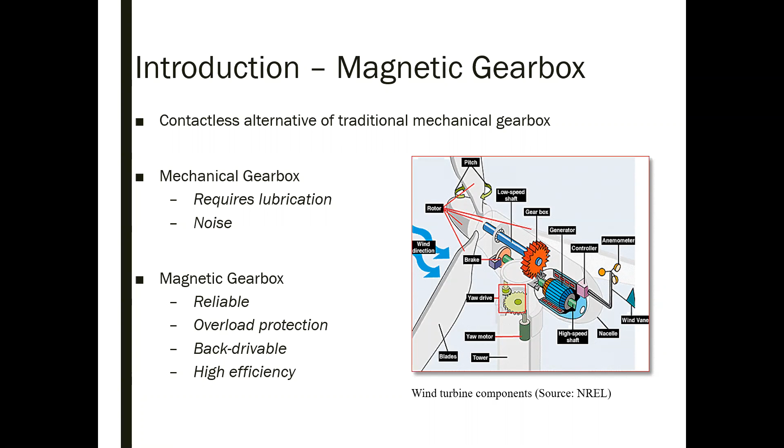This research is to design a magnetic gearbox with certain design objectives. First is to achieve a high volumetric torque density, preferably about 300 Newton meters per liter, while remaining a small outer diameter, which is optimal for wind turbine applications.

The assembly procedure for a magnetic gearbox has always been a struggle, so for this design we intend to improve the assembly process and hope to benefit future designs. Previously, a main source of loss was due to the conductive material used for cage lamination support, so to improve losses in this design we will need to make modifications to the cage modulator.

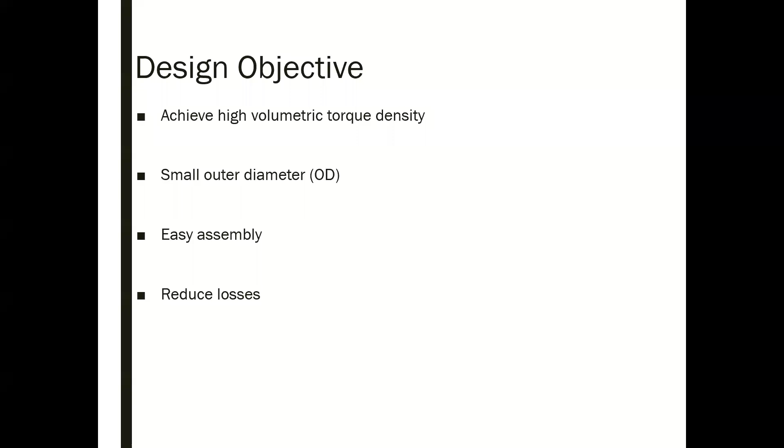In order to accomplish all the tasks, some decisions were made at the very beginning. The Halbach array was known for its property of creating a highly sinusoidal field distribution, which offers the potential for both increasing torque density and lowering harmonic-related loss. Therefore, Halbach array rotors were applied to all magnet rotors for this design.

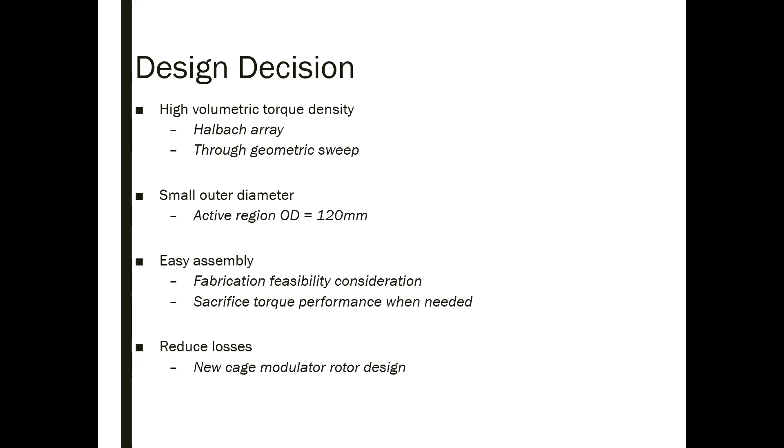An OD of 120 millimeters was selected for its size limit. Throughout the design process, we needed to ensure that all final geometric parameters are feasible to fabricate, and the assembly procedure should be considered while making all decisions. Finally, the cage modulator segment design will be modified to have a non-conductive material support structure.

To begin the design process, a few parameters were fixed. The pole pair combination was selected with 2 prime numbers to begin with. Ideally, with prime numbers selected, the design would result in lower torque ripple. Therefore, P1 of 3 pole pairs, N2 of 17 pole pairs, and P3 of 14 pole pairs were selected for each rotor.

This gear ratio was selected since it is within the most suitable range for small-scale wind turbine applications. Similar to the use of the Halbach array, in order to maximize torque performance of the gearbox, air gaps between rotors were set to the minimal mechanical fabrication limit of 0.5 millimeters. In terms of material, N48 neodymium magnets were selected for torque improvement purposes, and the cage rotor will be laminated steel in order to lower eddy current losses as much as possible.

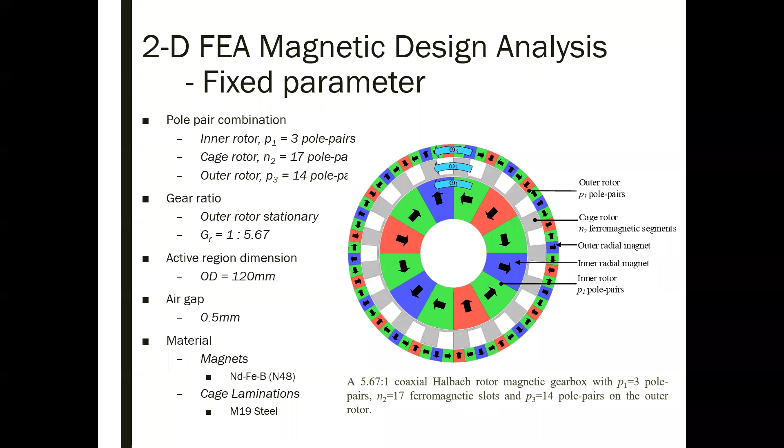With all the decisions made on these fixed parameters, 3 main variables were swept: the inner radius of the inner rotor RI1, outer radius of the inner rotor RO1, as well as the cage rotor radial length L2. Any other parameters would change accordingly to these 3 variables.

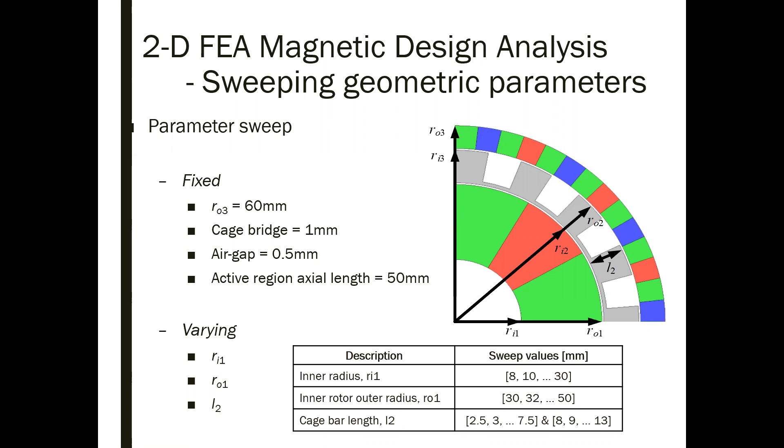A total of 2,244 cases were simulated under JMAG's 2D FEA static analysis when the gearbox is at peak torque angle. Volumetric and mass torque density were calculated to generate this plot. The color-coded legend indicates data points with different cage rotor radial lengths, where the top right boundary region of the plot would be the most notable design to look into.

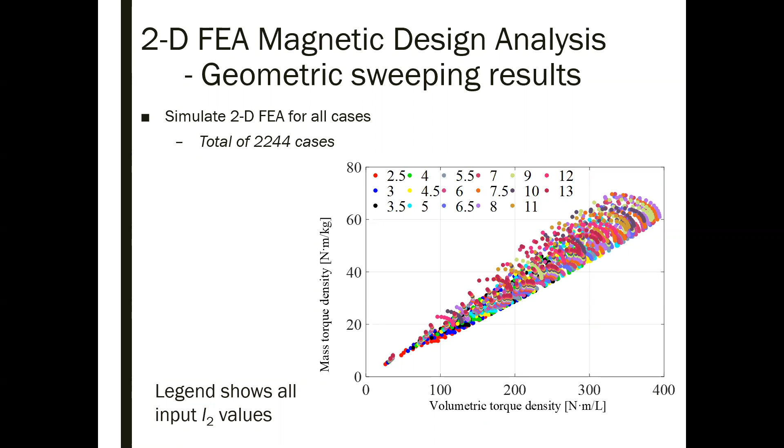Here's a zoomed in image. We can clearly see the performance of each interested case. The maximum mass torque density and maximum volumetric torque density cases were easily located, where the maximum mass torque density is labeled as design A and maximum volumetric torque density is labeled as design B. They show about 70 Nm per kilogram and close to 400 Nm per liter respectively.

However, we decided not to carry on with either of these 2 designs due to the fact that some dimensions were not feasible to turn into an actual prototype. For example, cage rotor radial length for both designs is so short that it's less than 10 millimeters. Any supporting structure we would use might deflect and close up the air gap. Also, design B requires an inner rotor inner radius of 8 millimeters, which was not preferred since we would like to have a shaft going all the way through the inner rotor.

To make the design mechanically rigid, we considered a few additional limitations on the geometric parameters. L2 and RI1 were limited to be no smaller than 10 millimeters and 15 millimeters respectively, and under this assumption, the trade-off design C was selected. Design C would have a relatively high mass torque density and volumetric torque density, while mechanically it would be feasible to fabricate and the structure should be rigid.

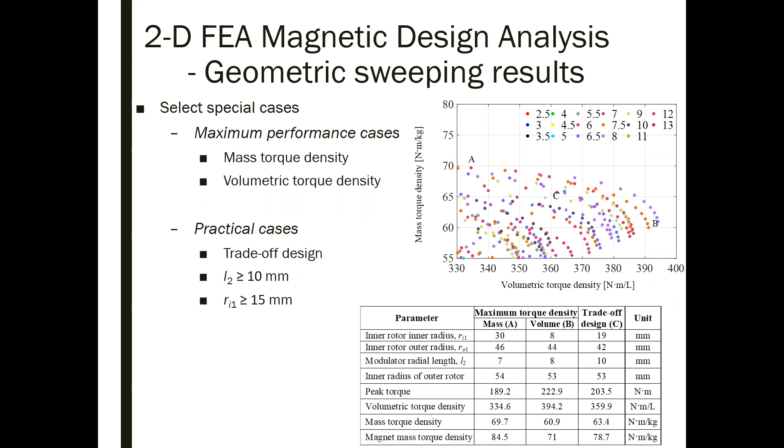In addition to the aforementioned geometric parameter constraints, further considerations and modifications were made based on the trade-off design. As mentioned before, we modified the cage design to allow a non-conductive material to further reduce losses.

For the cage rotor, the slot has been made rectangular in order to fit the supporting structure, as well as the inner rotor and outer rotor design.

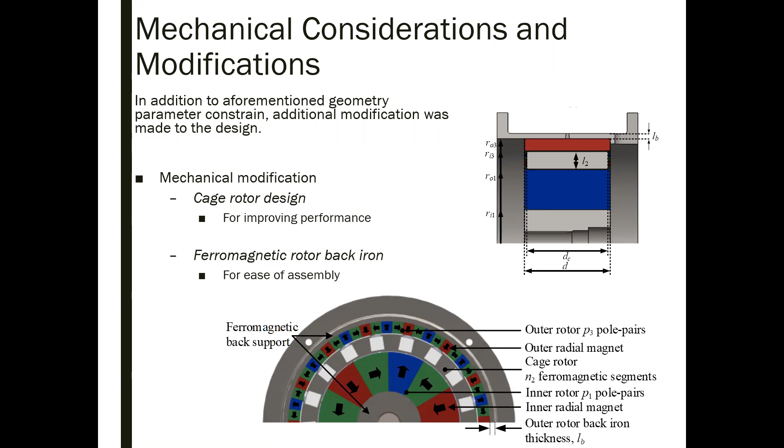They now have back irons for simpler assembly purposes. So in order to make the assembly easier, we now have back irons for both inner and outer rotors, since the magnets want to attract to the ferromagnetic back iron naturally, making assembly easier.

For inner rotors, since a shaft would need to go all the way through the rotor, the back iron was determined to be a solid cylinder with radius RI1. However, the outer rotor back iron still remains undetermined.

With the full axial length of the active region covered, the radial thickness was swept to study the performance. Outer rotor back iron thickness LB was added beyond the active region OD of 120 mm.

As expected, with the outer rotor back iron implemented, the torque reduced. LB of 3 mm was selected for higher torque, as it was the minimum thickness required to provide sufficient mechanical strength.

It can be noted that when only the inner rotor back iron was implemented, the torque performance was not affected negatively at all.

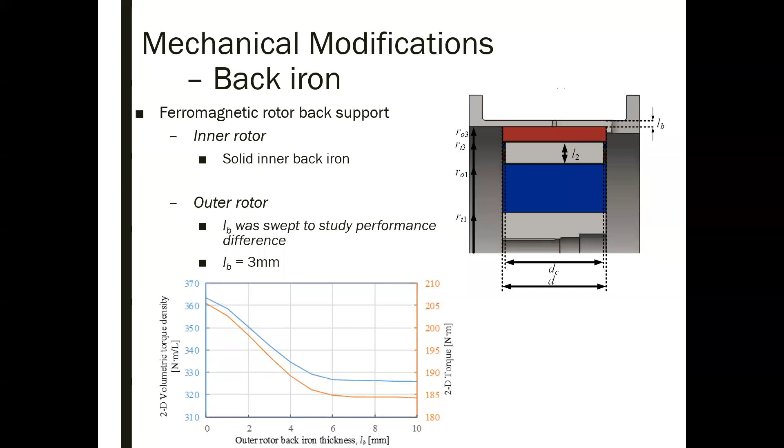Axial length of the model was also studied for its impact on torque performance. The finalized 2D design was extruded to different axial lengths. The 2D FEA simulation torque result changes proportionally to the axial length.

However, the 3D finite element analysis simulation showed a nonlinear relationship between the model axial length and the torque density performance, which was due to the axial flux leakage, known as an end effect.

If mechanically feasible, a long axial length would be optimal, optimizing the torque density performance of a magnetic gearbox. However, according to deflection analysis from the mechanical study, we finalized on an active region axial length of 50 mm.

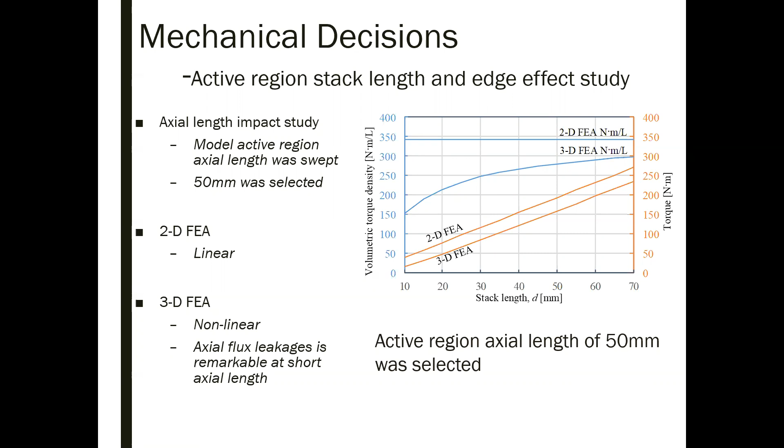So cage modulators are now modified to have rectangular slots. These slots were designed for inserting garolite bar cage supports. Garolite is a non-magnetic, non-conductive material. Therefore, comparing to previous designs which had steel rods going all the way through the center of cage segments, losses should be reduced.

According to Gerber in 2014, they showed that if cage rotor axial length was reduced slightly, the torque density could be improved, which leads to this last sweep analysis on cage rotor axial length, dc.

With a final active region stack length of 50 mm, the torque peaks when the cage rotor is 47.5 mm long, where the torque increased slightly above 1.3%.

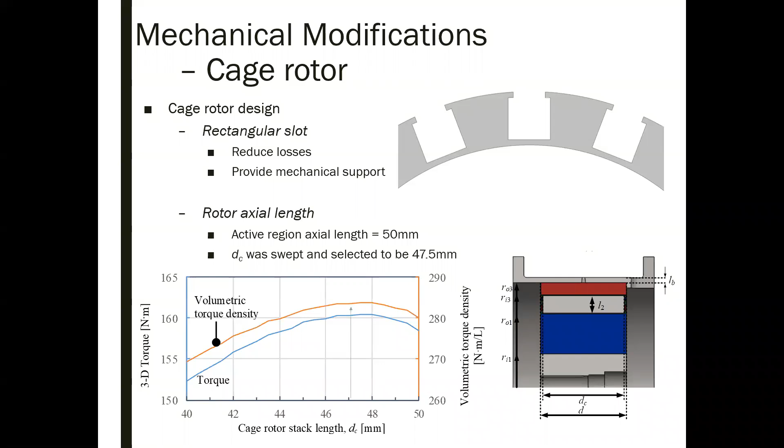Here's an image of the final gearbox design showing all the modifications that were made.

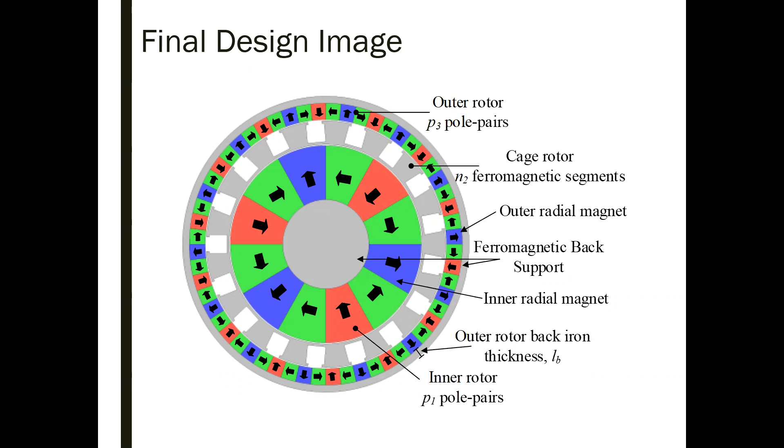After confirming all the geometric parameters, 3D FEA simulations were conducted. First, both inner and outer rotor were fixed with only cage rotor rotation, which is the case of pole-slipping. The final achievable peak torque was estimated to be 160.6 Nm, which is 284 Nm per liter.

Second, rotations were applied to the inner rotor and cage rotor according to gear ratio when the gearbox is at peak torque angle. Eddy current was allowed, and this demonstrated a torque ripple of 0.58% at peak torque.

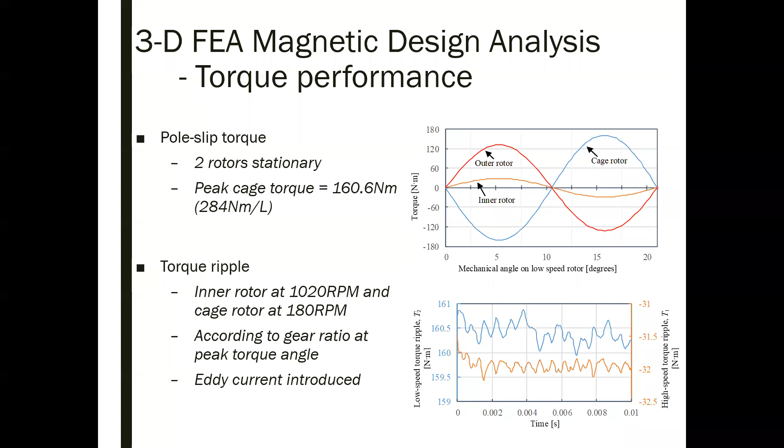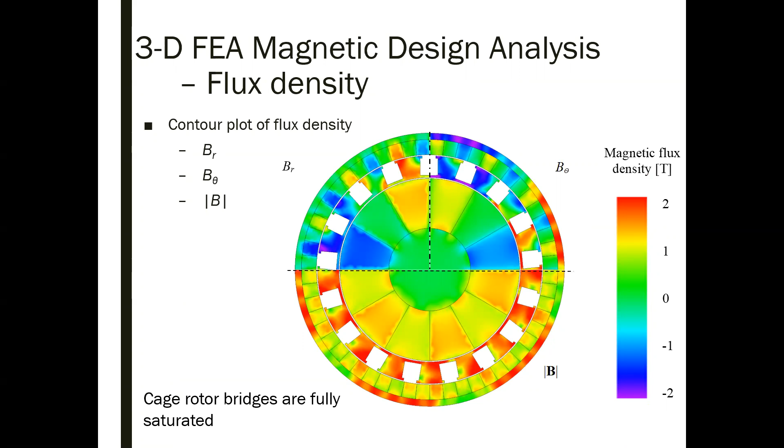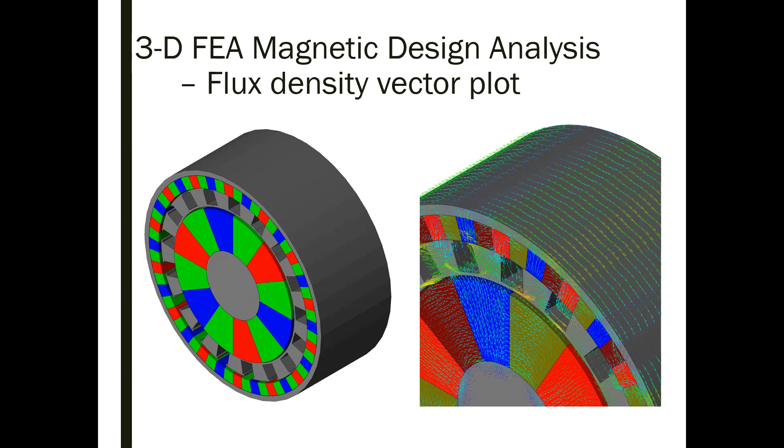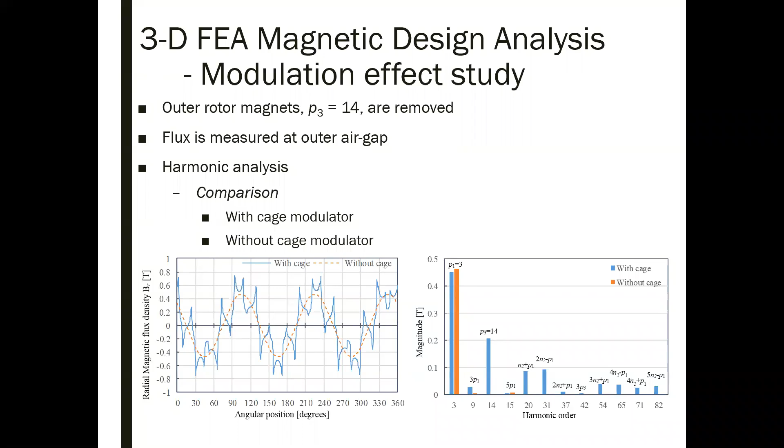After all analysis on the design, it was time to build a prototype. All garolite bars were inserted into the slots on the cage lamination, and Halbach array magnets were placed on both inner and outer rotors. The installation of magnets was indeed easier with the help of the ferromagnetic back iron.

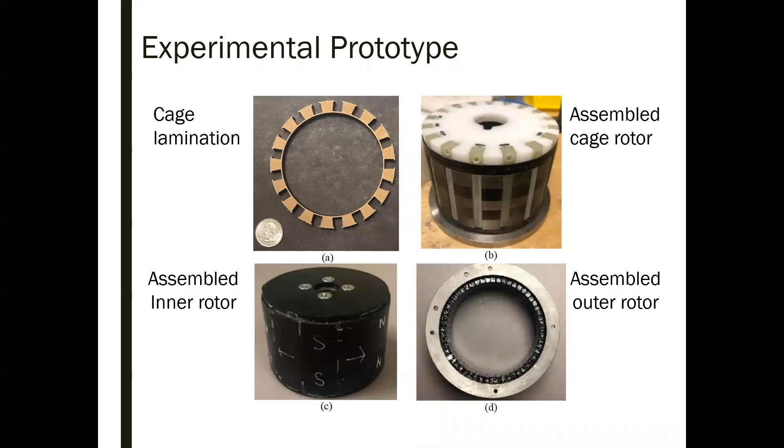Radial flux density was measured on both inner and outer magnet rotors to study any discrepancy between the FEA calculated result and the experimental result. Flux density was measured with a Gauss meter on both assembled rotors, isolated from all other components.

After collecting all data, a harmonic analysis was conducted. Here we can see the result for the inner rotor. It was shown that the inner rotor Halbach array magnets are slightly stronger than expected from FEA performance.

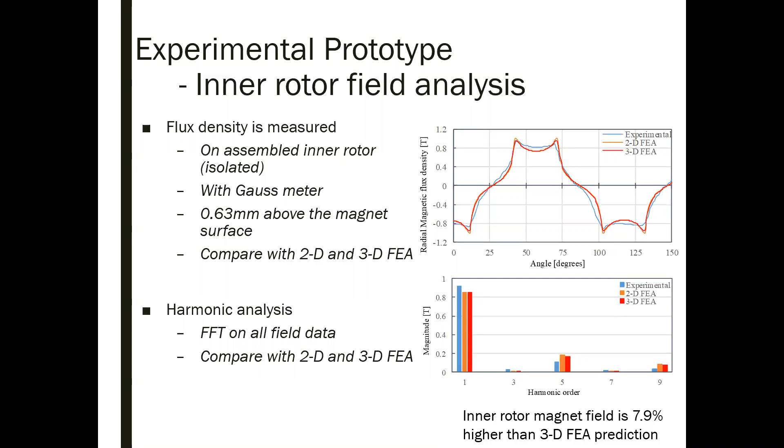And now we can see the results for the outer rotor. It was shown that the outer rotor Halbach array magnets are slightly weaker than expected from FEA performance.

After the experimental measurement of the rotor field, all rotors were put in place and the prototype was fully assembled. And here's some images of the gearbox.

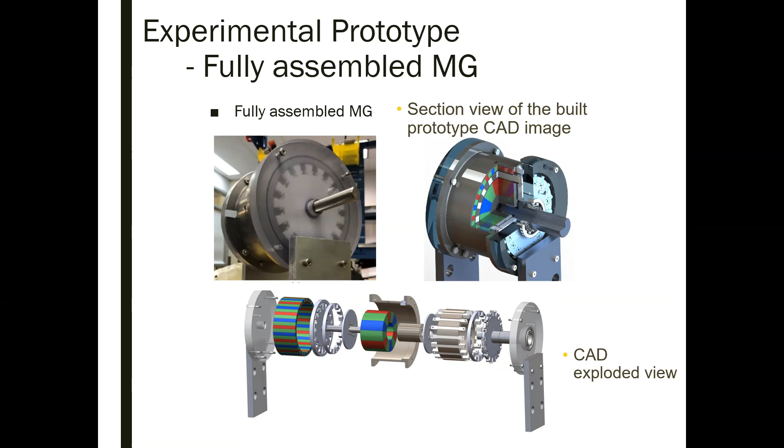The peak torque was then measured experimentally. This plot is showing the static pole slipping torque. The experimental torque was measured to be 147.8 Nm, which is about 8% lower than 3D FEA calculated values.

The associated torque density was 261.4 Nm per liter.

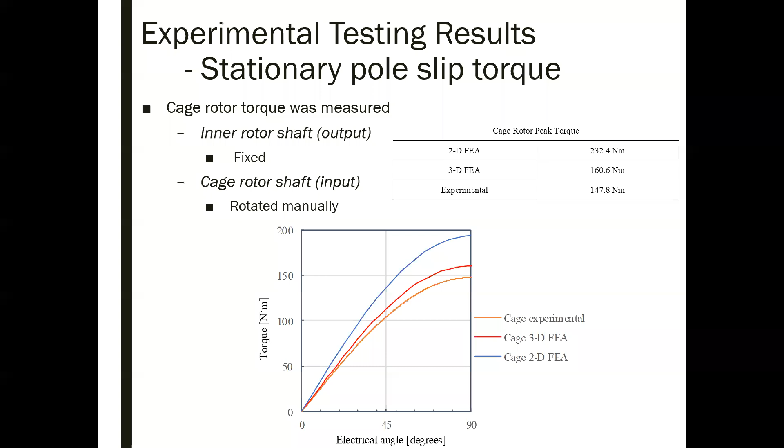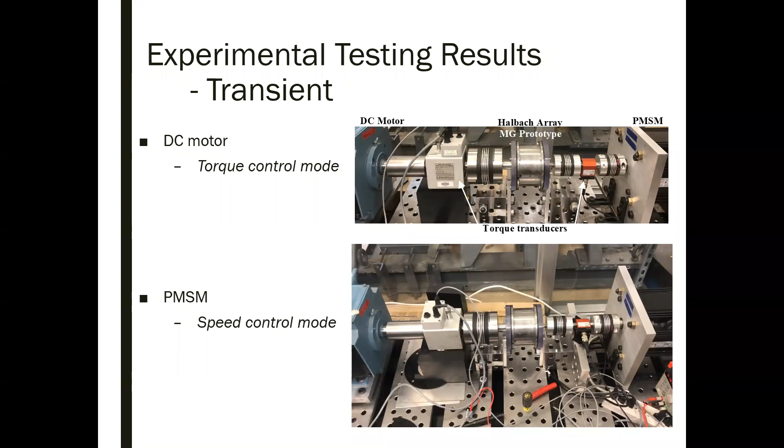Here shows the measurement on the constant torque result. Inner rotor was controlled to run constantly at 300 RPM, and torque was applied to the cage rotor with 55 Nm and 105 Nm.

We can see that even though the torque was successfully measured, the torque ripple was significantly higher than expected. We then suspected the additional ripple was from the testbed setup or other unexpected mechanical issue. After carefully studying the setup, we noticed that the components were not aligned properly, where the coupling was even damaged due to the misalignment.

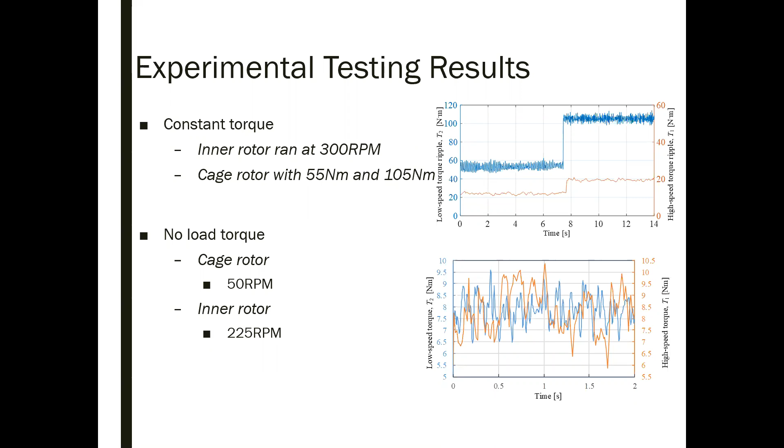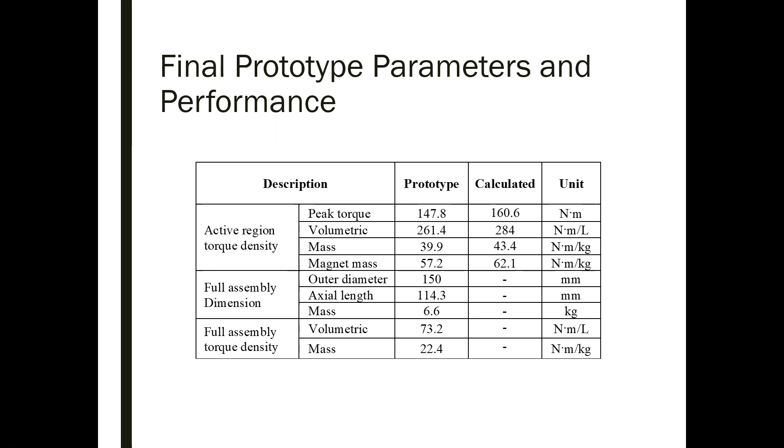So here shows a summary for the final prototype performance. It can be noted that as a proof of concept, the mechanical structure designed for the prototype was imperfect, causing the full assembly to be bulky and heavy. Hence, the full assembly performance is less impressive.

So to continue study on this prototype, we will need to align the setup properly and study the noise from the testbed. After doing so, we are planning to create an efficiency map on this gearbox by measuring the loss at multiple torque levels and multiple speeds.

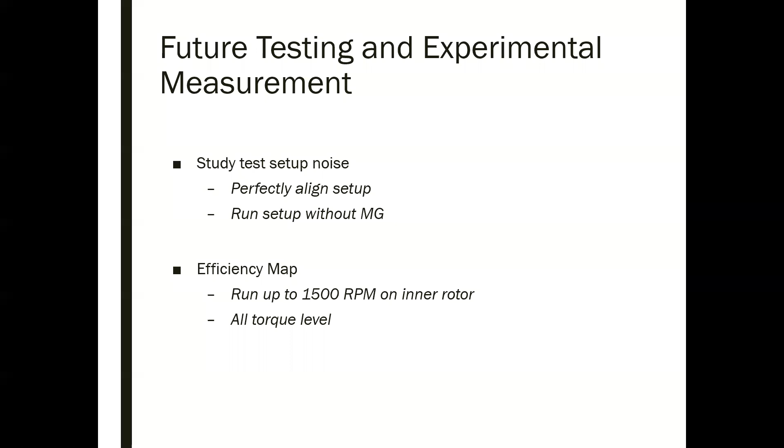Hey David, nice job. Yeah, thanks. Thanks for that insightful presentation on the Halbach magnetic gear. Thank you.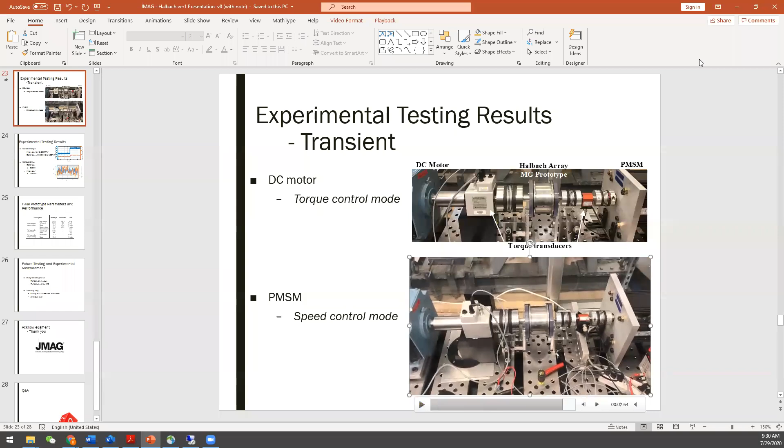Were the eddy current losses considered on the magnets? Yeah. Okay, so that's all included in your results then, right? Yep, yeah, those were set to be allowed under JMAG. Okay, thank you.

Oh okay, let's see, there's a Q&A, I apologize, I'm running back and forth here. From Peter: on your simulation work, could you comment on any challenges you faced in mesh discretization?

Well, I would say, first, JMAG allows you to control the mesh very, very well. So we were able to set up the mesh condition to a point that kind of already maxed out our computer performance, which we do have nice computers. So I don't think, not really, we are able to maximize the number of elements we have during any simulations we make.